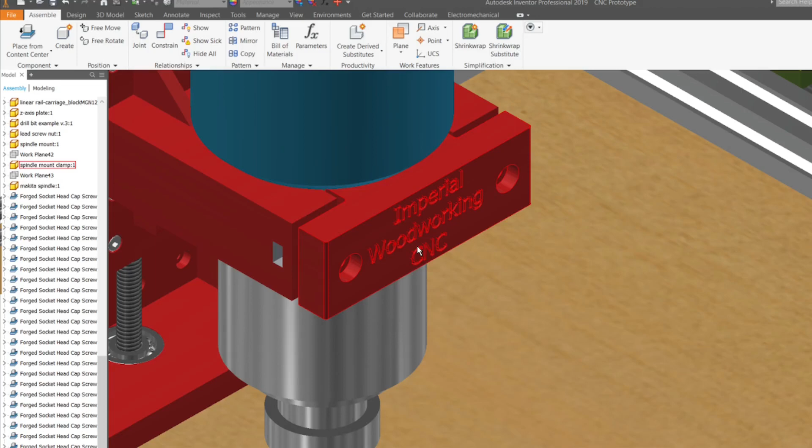In this 3-part build series, I'm going to be turning this 3D model into this. This is a homemade 3D printed CNC machine that I have been researching, designing, and developing for the last 7 months. I hope you guys enjoy it. Let's jump right into the video.

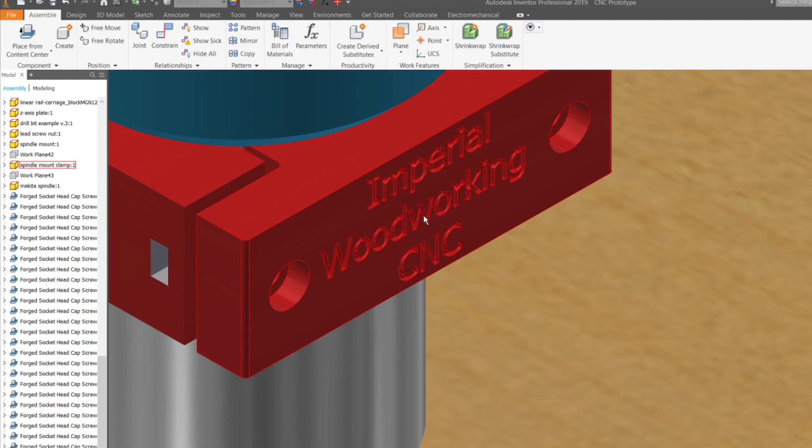Before we jump into the assembly of this CNC machine, I just want to show you guys my design. Everything in red will be 3D printed, and for now I will just be using basic PLA to print each part. I may upgrade to a stronger plastic later down the road, such as PETG or ABS, but my main goal is to eventually use this machine to mill aluminum parts to replace all the 3D printed parts. I don't plan on doing this anytime soon, but hopefully soon I can do that.

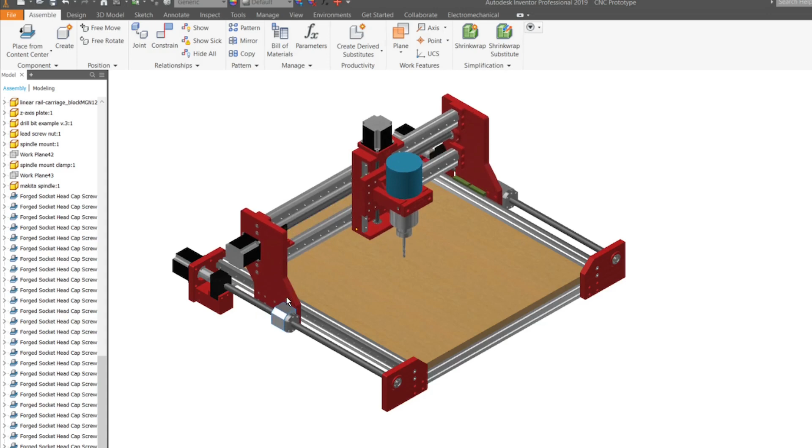With that being said, this machine is still very powerful and accurate considering it still uses plastic parts. If you are interested in building this machine for yourself, I will have all the STL files, electronic schematics, assembly drawings, and bill of materials for this build. With that out of the way, let's jump right into it.